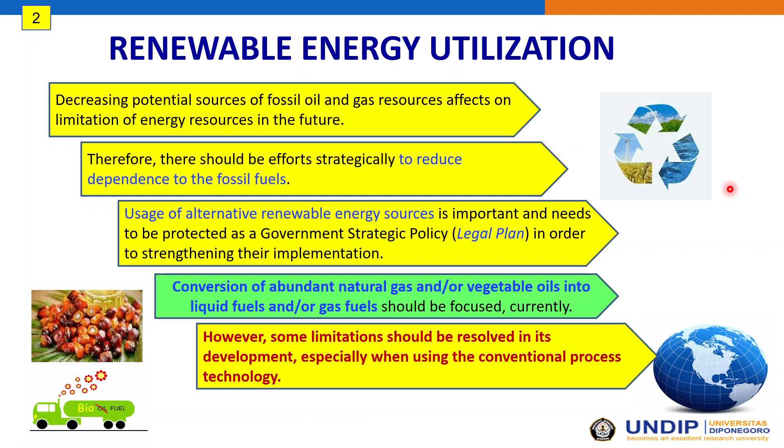We also have abundance of natural gas and abundance of vegetable oil that is potential to be converted to biofuel, and we have to be focused on this conversion right now. However, some limitations should be resolved in its development, especially when we are using the conventional process technology.

An advanced process is the plasma assisted technology for the conversion processes. This is an alternative solution. We have two methods in recent development, namely the plasma assisted catalysis process, or the second one is the catalysis assisted plasma process. We have three examples of the development of the hybrid catalytic plasma reactor.

The first one is the conversion of natural gas into higher hydrocarbons, maybe directly from natural gas into higher hydrocarbons, via coupling, oligomerization, and so on. The second one is biodiesel production, and we found significant improvement here in shorter reaction time. The third one is the development of the hybrid catalytic plasma reactor for cracking of vegetable oil, for example palm oil, into liquid fuel.

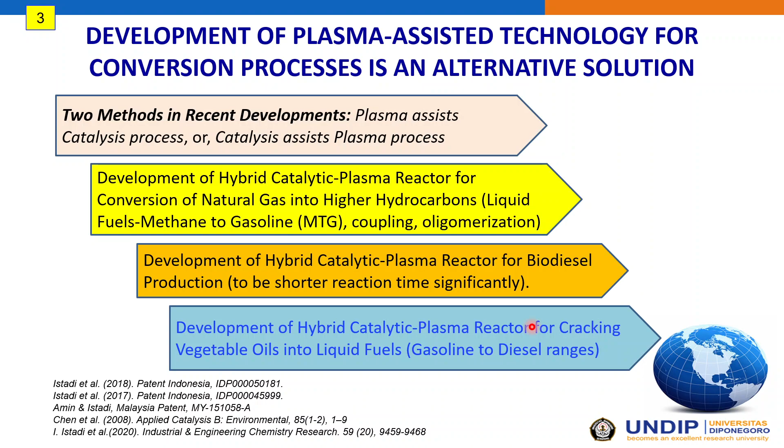Now, we have common problems in the conventional reaction process. For example, the longer time of reaction, either in the homogeneous or heterogeneous catalytic process. Also, requirement of high energy of the reactor, and then deactivation of the expensive catalyst because of coke formation. This is a common problem in the conventional reaction process. Also, it needs more effort and time in product separation processes.

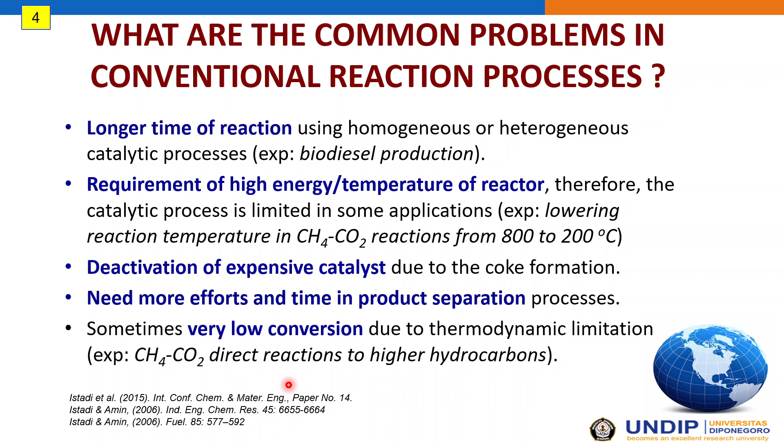For example, in the homogeneous catalytic process of biodiesel production. And then sometimes very low conversion because of thermodynamic limitation, for example in the reaction between methane and CO2 for direct reaction to higher hydrocarbon.

We have a benefit when we use the hybrid catalytic plasma reactor technology. The first one is the synergy between the high energetic electron and the catalytic activation role on the surface of the catalyst. This synergy is very important to be investigated more in the future.

The high energetic electron from the plasma, produced from the high voltage power supply, has a role in breaking the chemical bond or assisting the catalytic process, maybe exciting the bonding electron pair so that the bonding pair is easier to be broken. Therefore,

the catalyst has a role on the surface of the reaction for directing the chemical reaction, or increasing and improving the selectivity, because the catalytic reaction is performed easily at lower activation energy. The catalyst also has a role in directing the reaction selectivity.

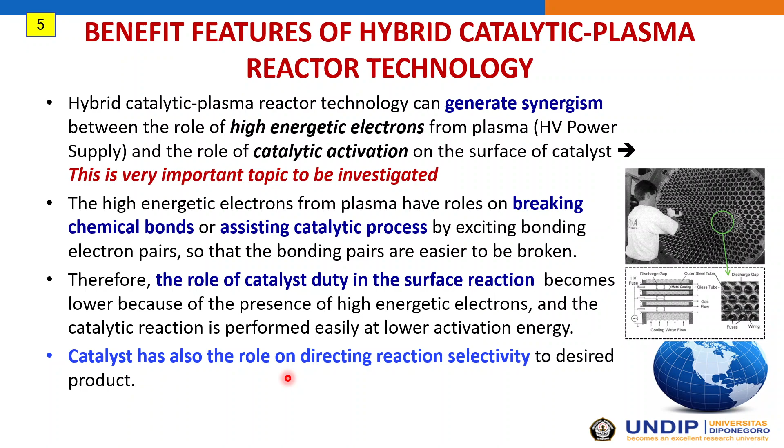This is very important in the catalytic plasma reactor, because when we use only the plasma reactor, the direction of the reaction cannot be controlled, or it is difficult to control the direction of the reaction. So this is the basic principle of the hybrid catalytic plasma reactor.

We produce here the energetic electron from the high voltage power supply and introduce it to the high voltage electrode, and the electron will flow to the ground electrode and contact with the molecule of the reactant, and the energetic electron will affect the bonding electron pair on the reactant, maybe exciting the electron pair on the catalyst surface.

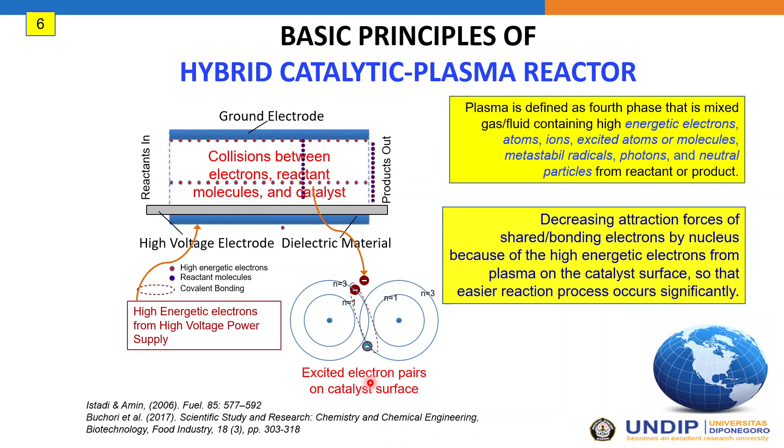So after the electron pair is excited, the breaking of the bonding will be easier.

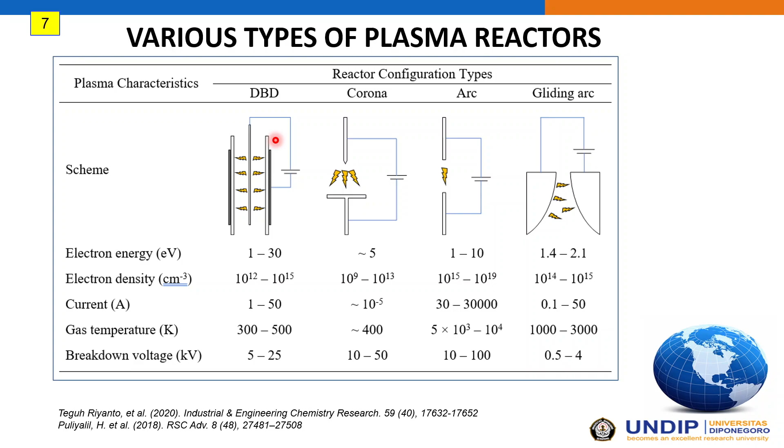This is the various types of plasma reactor. We have the DBD, and then the corona, and then the arc, and the gliding arc. We have 4 types of plasma reactor. We can choose the suitable type of reactor; it depends on the system.

This is the classification of the hybrid catalytic plasma reactor system. We have two classification groups depending on the position of the catalyst toward the plasma: the single stage catalytic plasma reactor, and the two-stage catalytic plasma reactor, either pre- or post-plasma.

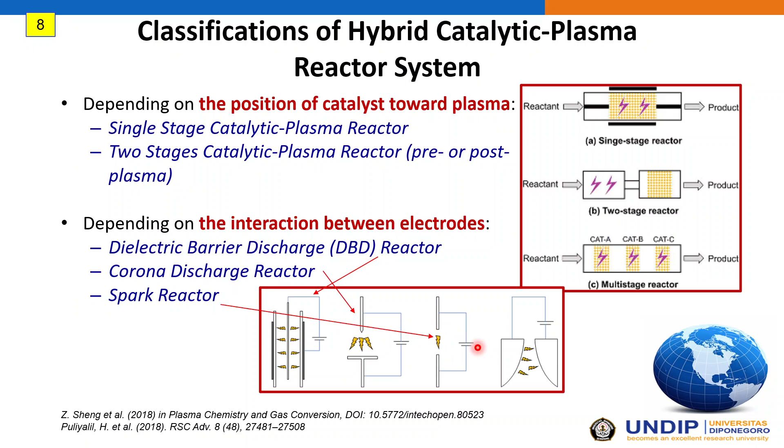Depending on the interaction between the electrodes, we know the DBD. We have a dielectric barrier, then the corona discharge tip-to-planar, and then the spark or arc reactor, which is tip-to-tip in relation.

With respect to the single stage hybrid catalytic plasma reactor, in this system the catalyst pellet will be packed within the plasma discharge zone, or alternatively coated on the surface of the electrode. This catalyst could completely or just partially overlap with the plasma zone, so that the plasma and the catalyst could directly interact with each other.

So the energetic electrons and the catalyst will be molecularly interacted and become a complex interaction, where the catalyst assists the plasma process, or the plasma assists the catalysis process.

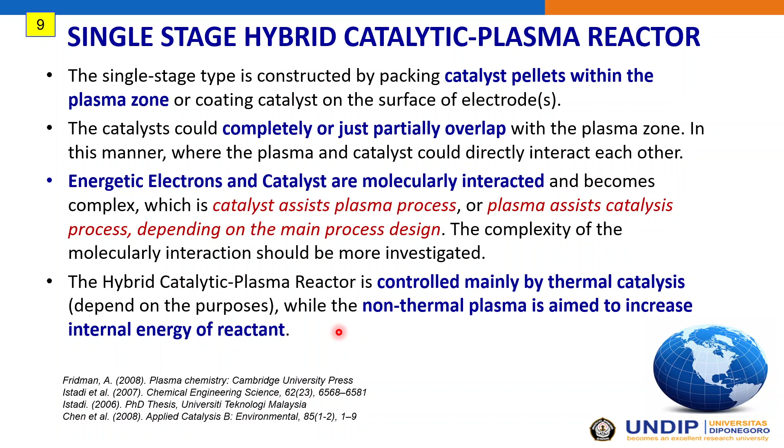In the hybrid catalytic plasma reactor, the reactor is controlled mainly by thermal catalysis, by introducing the catalyst into the discharge zone. While the non-thermal plasma is aimed to increase the internal energy of the reactant, because there is no heating in the non-thermal plasma. Therefore, the non-thermal plasma mainly contributes to vibrational excitation of shared electrons within the reactant's covalent bonding, rather than dissociation or ionization.

Depending on the power of the high voltage power supply, the activation energy will be lower.

For the conventional thermal catalysis, the most gaseous reactants are in ground state when reaching the catalyst surface, so the activation energy will be higher when we compare with the plasma.

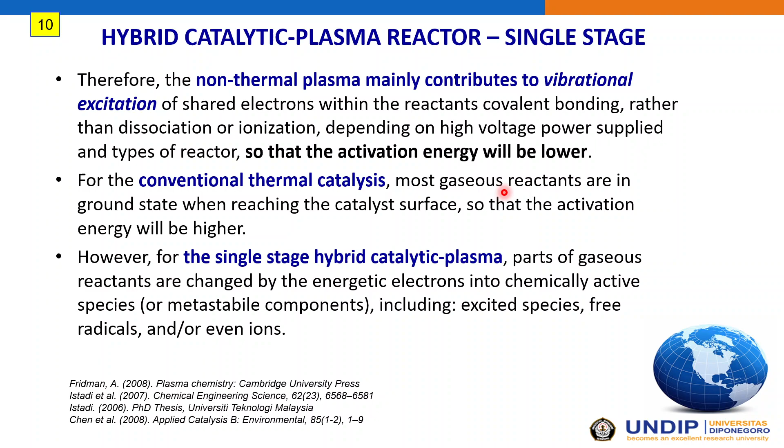However, for the single-stage hybrid catalytic plasma, parts of the gaseous reactant are changed by the energetic electrons into chemically active species, or metastable components, for example excited species, free radicals, or even ions.

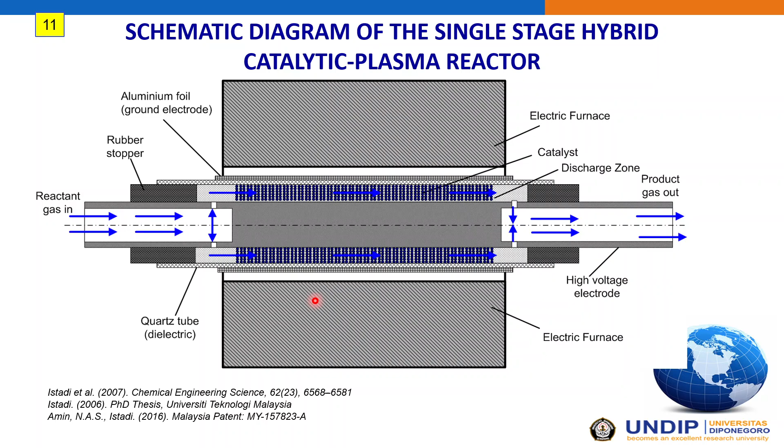This is the schematic diagram of the single-stage hybrid catalytic plasma reactor. We put the catalyst here in the discharge zone. These are the ground electrodes, and this is the high voltage electrode. This is the electric furnace to heat up the catalyst to reach catalyst activation.

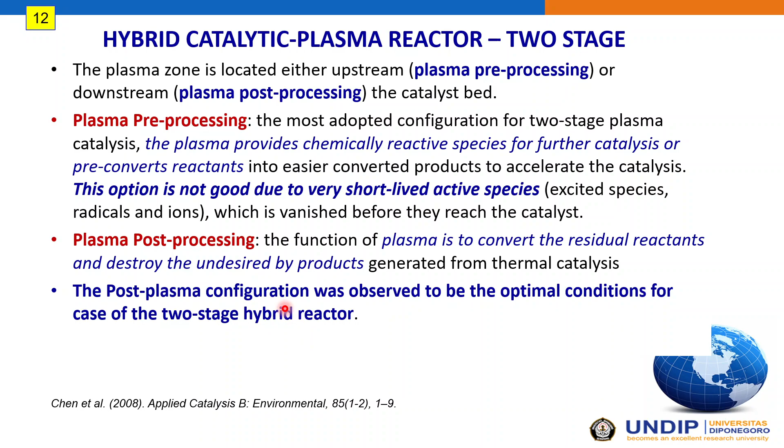In plasma post-processing, the plasma converts the residual reactant and destroys undesired byproducts. I think this post-plasma configuration was observed to be the optimal condition for the two-stage hybrid reactor, based on previous researchers' conclusions.

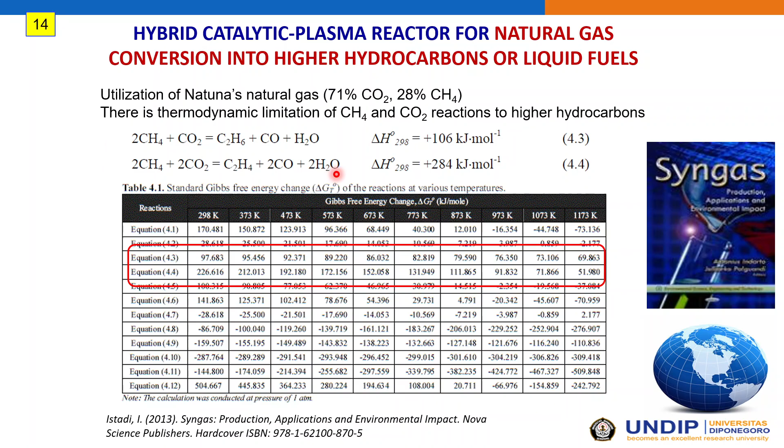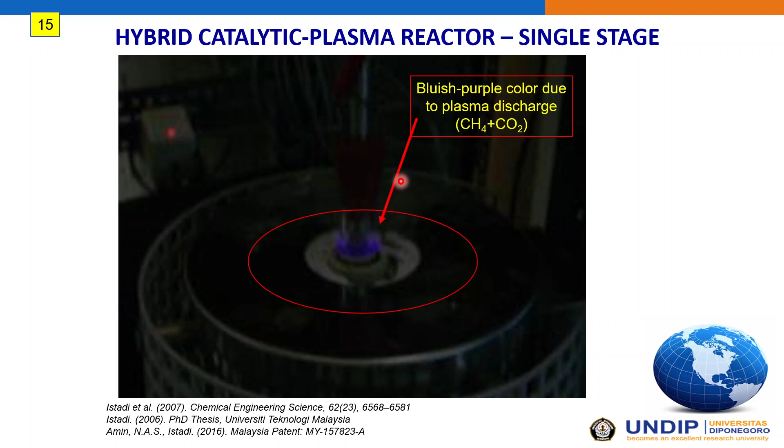This is the hybrid implementation of the hybrid catalytic plasma reactor for the methane and CO2 reaction. The bluish purple color here is due to the plasma discharge of the methane and CO2.

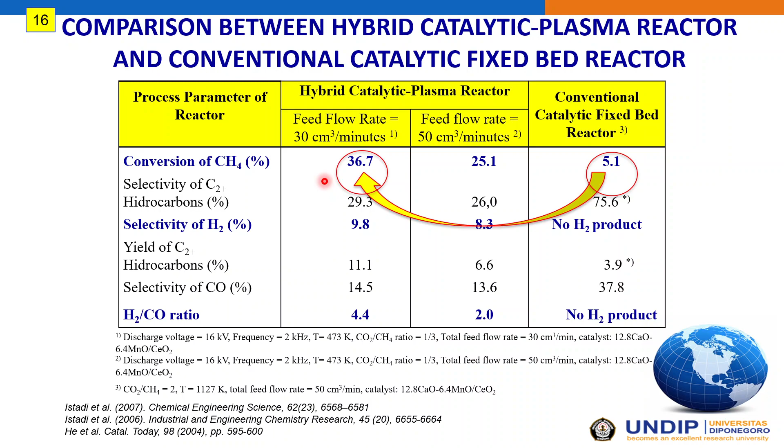This is the improvement when using the hybrid catalytic plasma reactor in comparison with the conventional catalytic fixed bed. With the conventional catalytic fixed bed reactor, we only have a conversion as low as 5.1%. Many researchers only found 5% conversion of methane when reacting methane with CO2. When we introduce plasma within this catalytic fixed bed reactor, we can improve the conversion to about 36%.

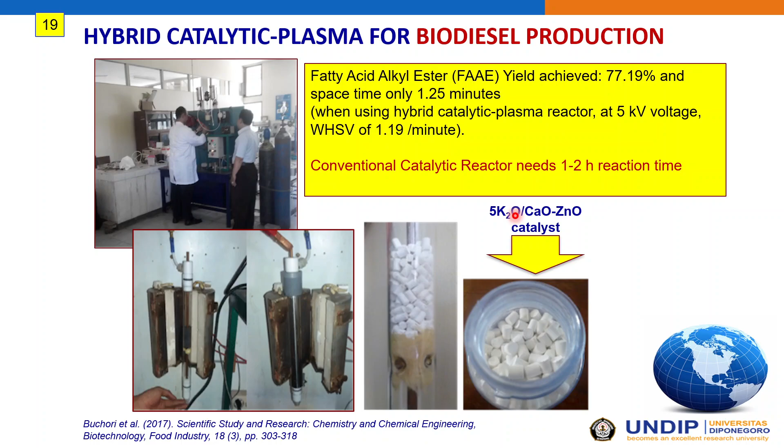This is the catalyst, and then the reactor, and when we put the catalyst within the reactor on the discharge zone, the catalyst used here is 5% potassium oxide supported on CaO zinc oxide.

This is the example of the implementation of hybrid catalytic plasma reactor for cracking palm oil to biofuel. This is not transesterification, but cracking. Here the reactant is only vegetable oil without methanol.

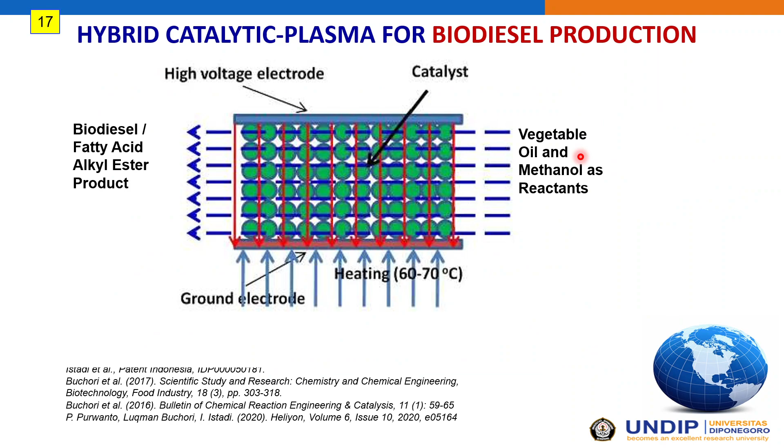For biodiesel, we introduce vegetable oil and methanol. But for cracking, we only introduce vegetable oil, and we can get hydrocarbon products, the lower hydrocarbon as the main product, and also ketone, ester, alcohol, organic acid, and glycerol.

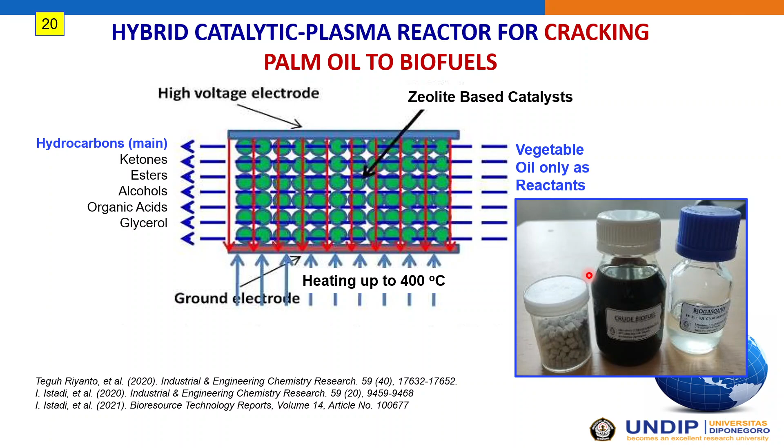We use here a zeolite-based catalyst. This is the activity in the implementation of the hybrid catalytic plasma reactor for cracking palm oil to biofuel.

The first step is the design, creating, and modifying of the zeolite-based catalyst to be suitable for the hybrid catalytic plasma reactor system, by improving the Bronsted acid site and also the Lewis acid site. The second step is modifying and optimizing the hybrid catalytic plasma reactor system itself.

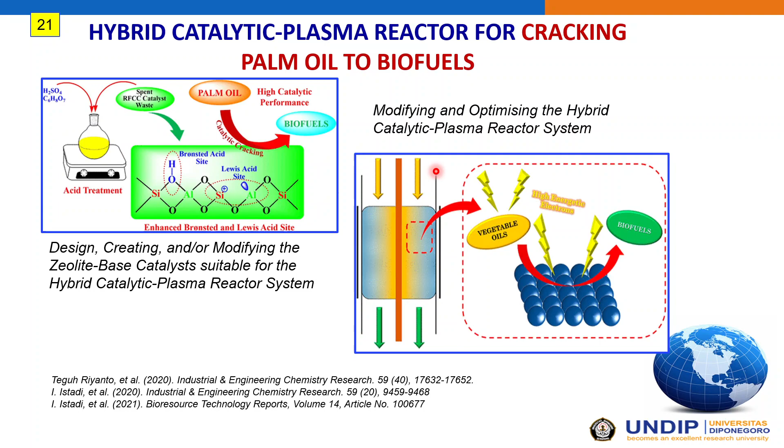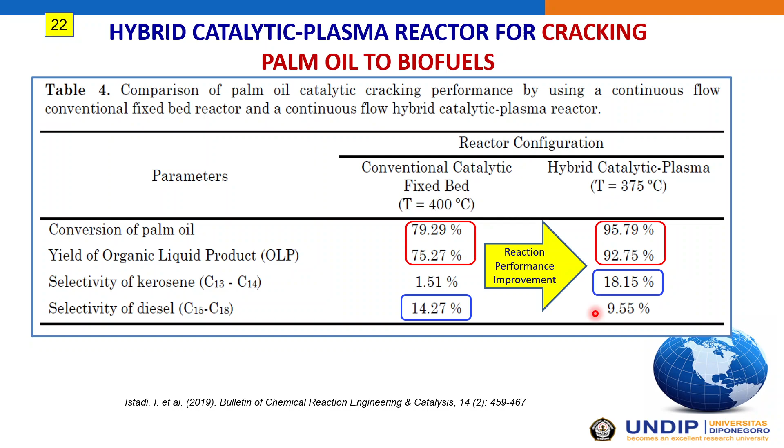This is the comparison between the conventional and the hybrid reactors. When we compare these, you can see that the hybrid catalytic plasma reactor is better than the conventional catalytic fixed bed.

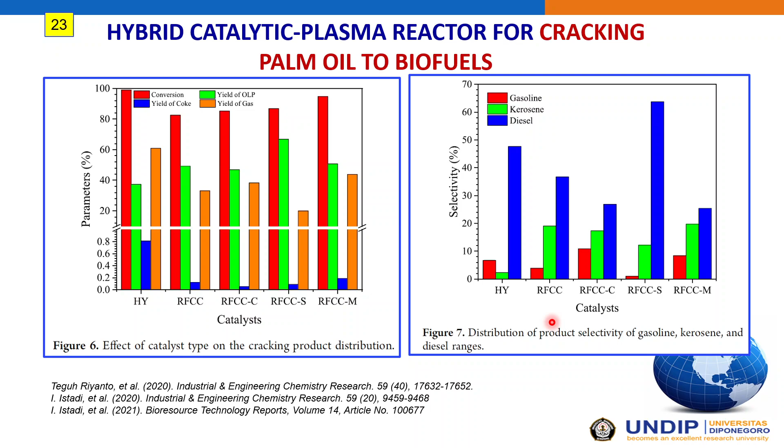This is the performance of cracking palm oil to biofuel, as the selectivity of gasoline, kerosene, and diesel mainly depends on the catalyst, or the combination and synergy between the plasma and the catalysis.

Finally, we have a summary of this presentation. Usage of plasma technology for assisting catalytic reactions could significantly enhance the conversion or yield, especially for coupling, oligomerization, transesterification, and cracking purposes. Plasma could assist the catalyst to decrease the activation energy of the reaction on the catalyst surface.

Various plasma reactor designs for the coupling, cracking, or transesterification process have been developed. However, the DBD plasma reactor appears to be the most promising design compared with other kinds of reactors.

Several process parameters, for example the discharge gap, feed flow rate, applied voltage, the presence of the catalyst, and the reactor temperature, are important process parameters that should be more investigated, especially to find the synergistic role between the plasma and the catalytic activity.